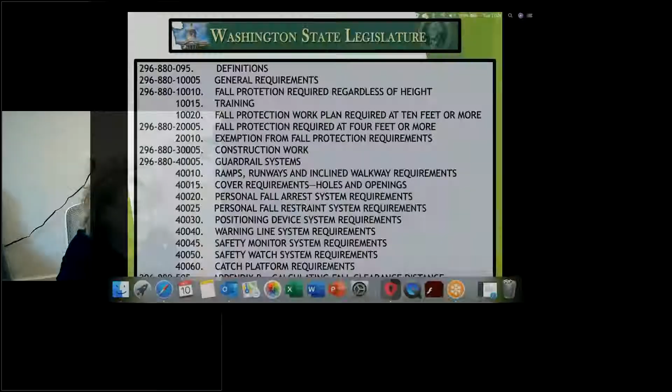Excellent, good, perfect. All right, welcome everybody, two weeks later, I hope everybody's been doing well. Tracy and I were just talking about the crazy weather going on around here, and I hope we're all ready for the winter months. I couldn't imagine being roofers out there in the wet and the snow and the winter months, so good on all you guys. Hopefully you didn't have any questions that came up over the last two weeks about what we covered in the first session. If you do, please feel free at the end of all of this, ask your questions and I'll try to answer them as best as I can.

You have handouts from the first session and handouts from what we're going to cover here today, so I just wanted to refresh your memories. It's been two weeks. These are the new WAC codes, the Washington Administrative Codes. It's now 296-880, and we covered 095. We covered the definitions, we covered the 100s, which were the general requirements, fall protection regardless of height, your training requirements, having that fall protection plan. We covered the 200s, which was fall protection required at 4 feet, because now in the Unified Fall Protection Code, we really only have two trigger heights: at 0, regardless of height, and then at 4 feet.

Then you get into the 300s, so we're going to cover 300-05, which only pertains to construction. There's 310, 315, 320, so on and so forth, but guys, I really didn't think any of us cared about those. That's for ski lifts and for ports and different industries out there that are not actually construction. So in the 300s, this is now what's required above 4 feet for the different industries you belong to: fixed industry, construction, the ski lift area, all of that kind of good stuff. For the 305s, we'll talk about construction — it's really just the 10-foot rule.

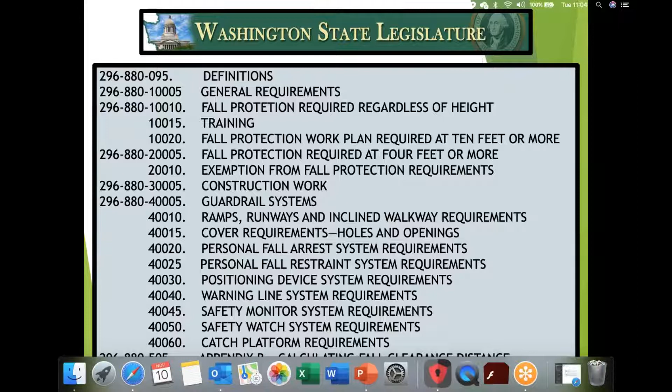So let's jump into the 300s. Construction work, and what do we have to do for construction work? 300.05: this scope only applies to work activities under 296-155, which is construction based, unless it was specifically addressed in the 200 section, which was the 4-foot rule. So employers need to ensure that some kind of fall arrest system, restraint, or positioning device is provided. Make sure we're installing it per the manufacturer's requirements, that we implement it in accordance with this chapter, anytime we have workers exposed to hazards that are 10 feet or more above the next level. So you could be 10 feet off the ground, or 10 feet above another level. This does include, if you guys were to ever work from a scissor lift, 10 feet, fall protection; boom lifts, fall protection 100% of the time. You need a fall protection plan as well. If you're working off of scaffolds, that falls into the 10-foot rule as well — with most scaffolds, it's a 10-foot rule. So when do we have to provide protection? At 10 feet or more. Look at you guys, you lead the way.

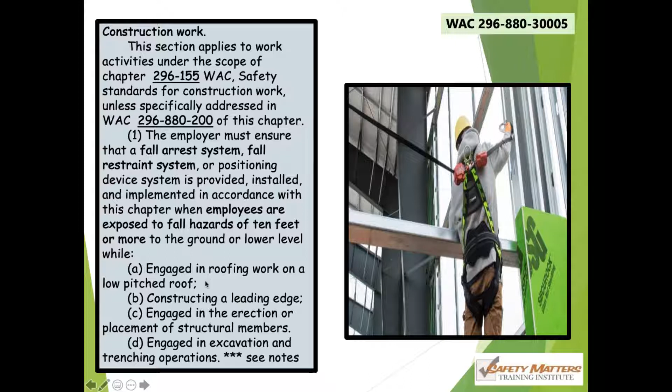Engaged in roofing work, only on a low pitch slope though, only on anything that's less than 4 and 12. If you're constructing a leading edge, remember what a leading edge was, that was an activity, it's a verb. You have to be actively laying down some kind of form work, some kind of roofing.

You need to be laying down form work, constructing a leading edge, or engaged in the erection or placement of structural members. What were structural members? That was a girder, a beam, a joist. If we stand the walls and we're walking on that 2x4, that 3.5-inch top plate, that's now considered a structural member. So we have a 10-foot exemption for these guys.

At 4 feet, low pitched, you guys don't need any fall protection per se. But once you get to 10 feet, then you're going to have to protect. And the bottom one, D, does not apply to you guys. I highly doubt you're trenching or excavating on a rooftop. So this is for the ground workers, the dirt workers.

There's always been a 10-foot rule. You don't have to be in fall protection if you're actively involved in an excavation or trenching operation, actively involved. If I'm just wandering around that trench or excavation and not engaged in the work taking place, then if it's deeper than 10 feet, we're going to have some protection for me. There's going to be exemptions.

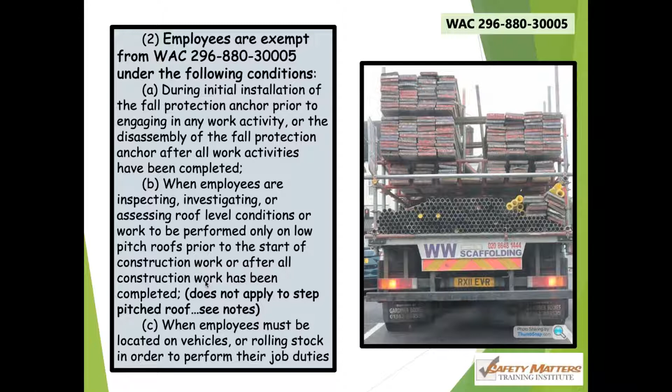So the 305 guys, it's really short. This is it: 305 at 10 feet. Who gets to, or when do you have to provide protection? 10 feet, roofing, leading edge, standing up structural members. There's exemptions to the 10-foot rule. These are basically the exact same exemptions that went into the 200 4-foot rule.

So who is exempt? First man up, last man down. You're going up onto the rooftop to set your anchors, you're exempt. You've finished all of your work, you're the last guy coming down, disassembling your anchor point, your fall protection system, you're exempt.

Inspecting, investigating, assessing the roof level conditions, again, only low sloped, less than 4 and 12. Anything over 4-12 is a steep pitch, and you are not exempt. So what was inspecting? You're going up on the rooftop to inspect to see how much materials you need to do your job. You're investigating. What was investigating? We're going up on the rooftop to look for damage, to assess if there's anything that needs to be repaired.

And then assessing the roof level conditions. Anytime we're going up on the rooftop to try and figure out what type of fall protection we're going to be providing to our workers, we have an exemption as well. Low sloped only, this does not apply to steep pitched roofs.

You probably don't remember this, but back in the 200 code, it stated that a working walking surface was anything that we worked from, stood on, passed along, gained access to, and it included flatbed trucks. So at 4 feet, if I was working on a flatbed truck, potentially my employer would have to provide fall protection for me if it was feasible, if it made sense, if it was not going to create a greater hazard.

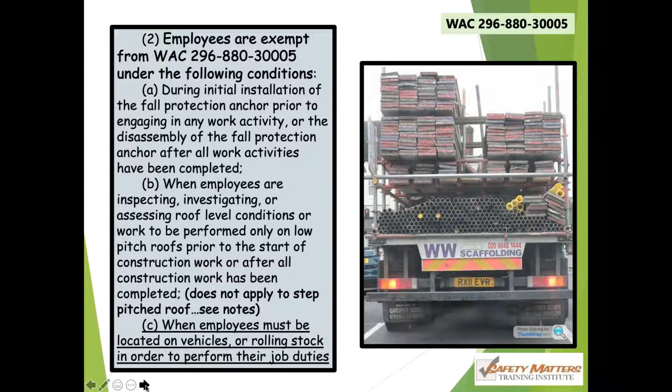So that's really all we need to talk about when it comes to the construction portion of this. Again, 10 feet when we're roofing, less than 4 and 12 when we're performing leading edge, laying down the formwork or the roof work, laying down those plywood sheets, or if we're standing structural members or engaged in trenching.

So how do you protect people? Guardrails. Guardrails are always the preferred method. Why? Because guardrails prevent the fall - they restrain you. And restraint, prevention of the fall, is always going to be your preferred method. So we'll talk about guardrails.

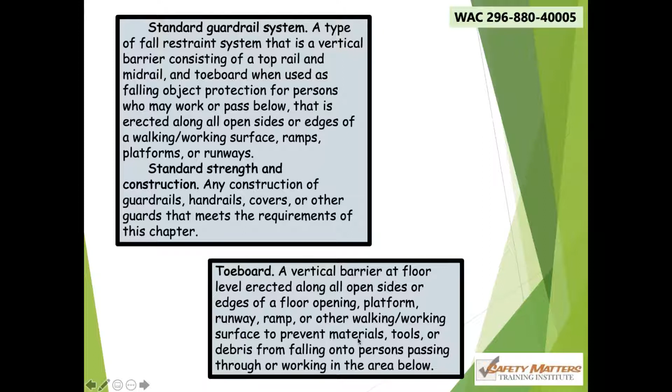Any open sides above 4 feet has to be protected. If there's people working below you, toe boards need to be put into place so we're not kicking stuff down on top of them. All of your walking and working surfaces - open sides, ramps, platforms, runways - above 4 feet need to have protection made out of standard strength construction. Toe boards act as an overhead restraint for kicking off tools or materials, saving materials, tools, and debris from falling onto persons passing through or working in the area below.

So guardrails, you guys should all be pretty familiar with this. Nothing really changed in the new unified code when it comes to guardrails. Your top rail, we like to see it at 42 inches, but you have a plus or minus of 3 - you can raise it up to 45 or drop it down to 39. This is always from the work surface up. It still has to be able to withstand 200 pounds of bursting strength.

This is if I'm basically pushing down at it from a downward angle onto the top bar, or from a sideways, lateral angle onto that top rail. It has to be able to withstand 200 pounds minimum - we can always beef these things up and make them stronger. Mid rail goes in at mid height, whatever you chose for the top rail. Mid rail has to withstand 150 pounds.

Toe boards - there was a change to toe boards. Previous to this WAC code change for the unification of fall protection, toe boards in Washington State were technically required to be 4 inches in vertical height, not more than a quarter inch off the ground. Nobody had 4-inch toe boards. The common practice is a 2x4 flipped up on its edge, but 2x4s are not actually 4 inches. OSHA says it's a 3.5 inch requirement, so we changed our standard here to just meet OSHA - it's now 3.5 inches vertical height. Best practice, of course, is always going to be your 2x4 on its edge.

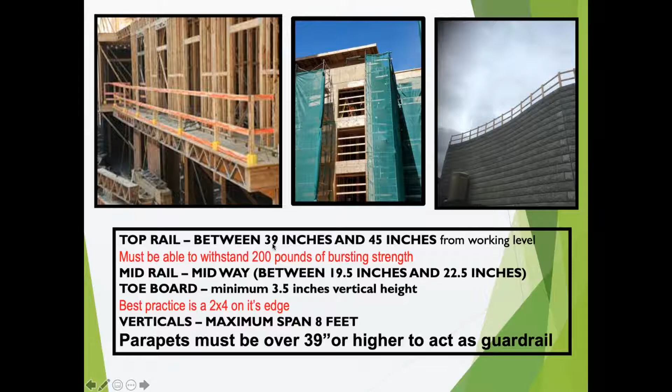Your vertical members of your guardrails, not to exceed 8 feet. When you guys are up there on the rooftop, if that parapet on the roof is less than 39 inches, it cannot be part of your fall protection. It can be the mid rail, but it cannot be your top rail. So the parapet wall, if it's less than 39 inches, you might have to bring in some other means and methods to protect your worker. It's got to meet that lowest minimum requirement of the top rail to then be considered fall protection.

Okay, so guardrails, where do we use them?

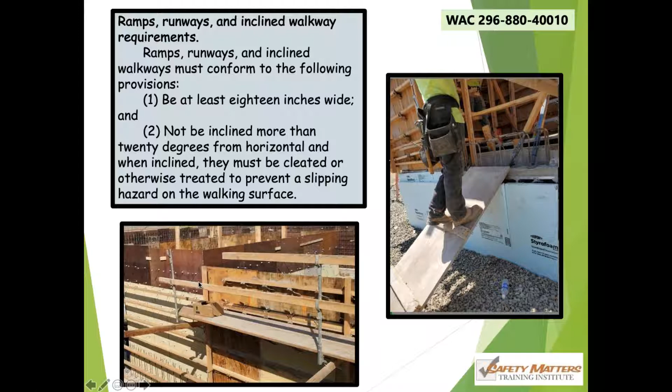Here you've got guardrails that don't extend all the way out along the open sides and don't close off that end there, so this is where they would need protection. Up there on the rooftops, if we have any holes on the ground, we're going to have to protect them.

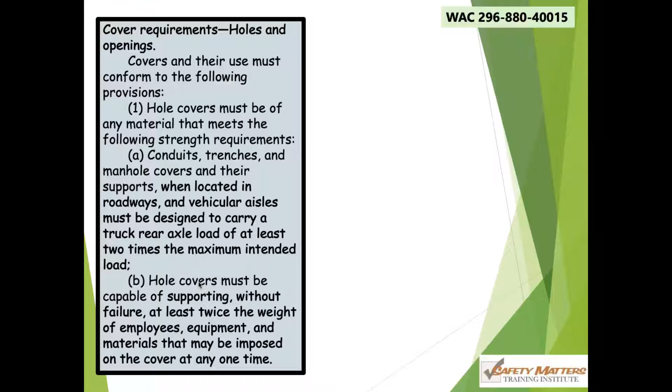What was a hole? If you go back to what we talked about 2 weeks ago, a hole was anything, a void that was greater than 2 inches in its least dimension. It was in the floor, in a roof, or in any other surface, so that can mean it's in the ground as well.

Hole covers need to be made of material that meets the following strength requirements. If you have holes located in roadways and vehicular aisles, they must be designed to carry a truck rear axle load of at least 2 times the maximum intended load. How much does that truck weigh? What's the load in that truck driving over that steel plate? Can that steel plate withstand 2 times the rear axle load of what's being intended on it? What's being imposed on it?

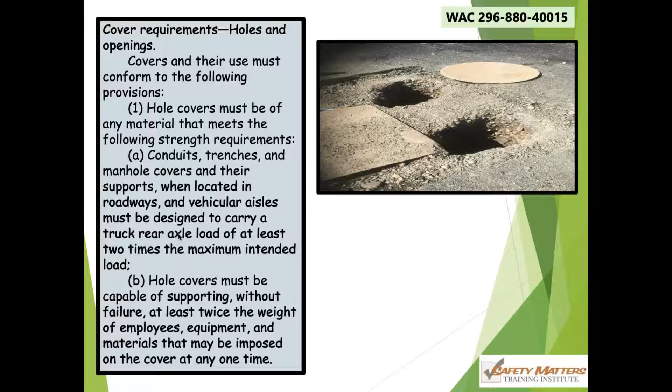Covers need to be able to support. This is new, a new strength requirement for hole covers. They must be capable of supporting without failure at least twice the weight of the employees, twice the weight of the equipment, twice the weight of the materials that may be imposed on that cover at any one time.

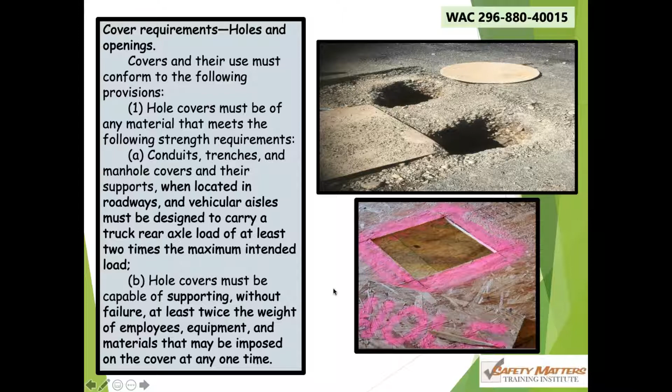So here's a hole that's been opened up. They've written hole on their cover, but they've left it unattended. That's one thing you cannot do. If you're going to remove a cover and you have a hazard, you cannot leave it unattended. You've got to post somebody there to warn everybody that there is a hazard.

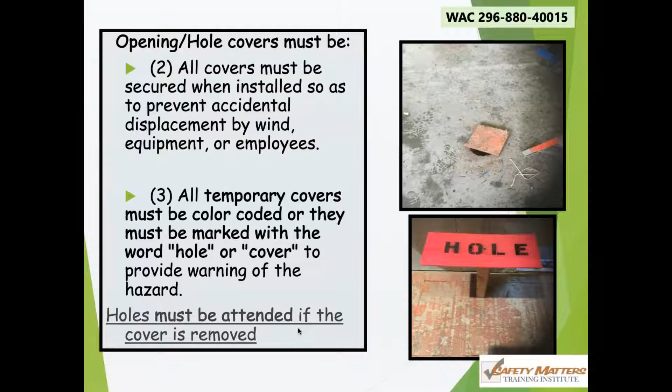A hole is a void 2 inches or larger through which an employee could step into, trip into, or step through. Anything larger than 2 inches needs to be protected. So you can cover things, or you can ask your workers to wear a PFAS, a personal fall arrest system.

There are some requirements that come into wearing personal fall arrest systems. Obviously, we need to wear only an ANSI approved class 3 full body harness. ANSI, American National Standards Institute. Fall arrest, fall protection gear is a Z359 series, so it has to meet the Z359 series, full class 3 body harness.

Anything that's been subject to impact loading, if a worker has fallen in it, it's removed immediately from service. It's not to be used again until it's been inspected by that competent person. A competent person simply has skills, knowledge, ability to recognize hazards, ability to predict hazards. They have some safety training, experience, and stop work authority. So it's usually the competent person who's inspecting the equipment.

Anything found damaged is removed from service. It is not reused. Some components, like your cable SRLs, you can send those back to the manufacturer and have them recertify it for you and send it back to you.

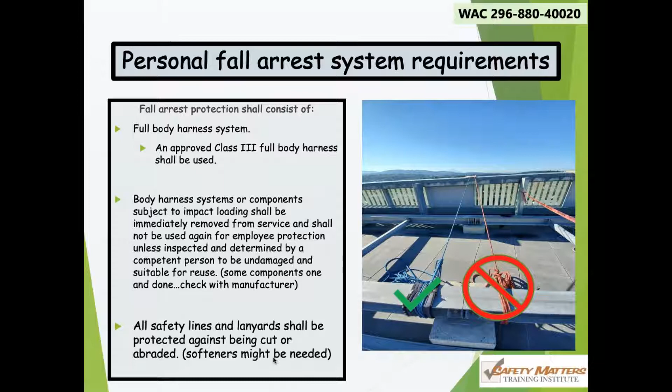So the red one, big no-no. Left one is okay with the softeners. What's not okay is just tying that rope around, wrapping it a couple of times and tying it back on itself as your anchor system.

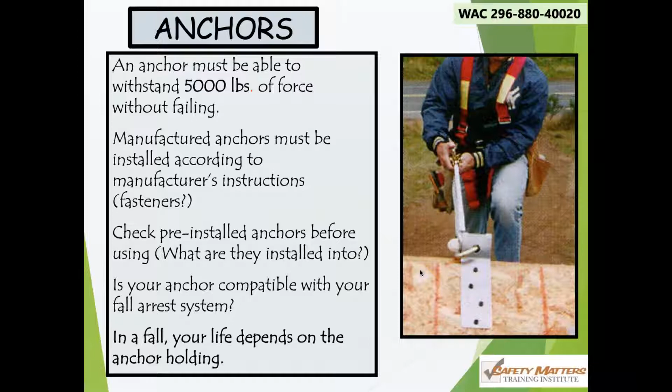Anchor systems up there on the rooftop, guys. Sometimes you have permanent anchors, sometimes you might be working with temporary anchors. It's just the same, anchors, nothing has changed here. They need to withstand 5,000 pounds of force, and they need to be installed per the manufacturer's requirements.

I love horizontal lifelines. I think any chance you get an opportunity to put your crew in a horizontal lifeline, do it. It minimizes your swing fall factor. It keeps an anchor point pretty much always in line with your worker.

But the problem about horizontal lifelines is, of course, you're anchoring low. With most of them, they're anchored to the rooftop, which means that if you were not using a lanyard, like a 6-foot-long lanyard, if you were allowed to get up to the edge, you would need to make sure you were in a leading edge yo-yo.

But there are temporary anchor systems that you can anchor up high. There are some that come with cross straps, so you can wrap a cement column and string it up between 2 vertical members that can support 5,000 pounds as part of your anchoring system.

Horizontal lifelines, great little device out there. I really encourage people, when you have the opportunity, get your workers out of lifelines where all the slack is out. There's only like two anchor points on a rooftop, and they've walked 30 feet away from their anchor line. Get them into a horizontal lifeline if you can. Figure out some system to keep that anchor point always right there with your worker.

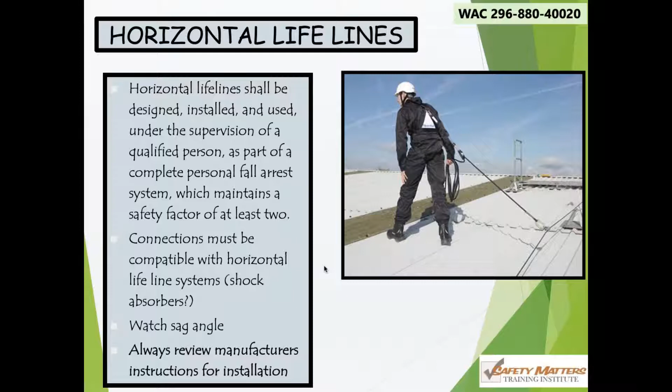Horizontal lifelines, another way you can protect. Here's an example of a horizontal lifeline. I did a competency fall protection training on a Microsoft rooftop because they had brought in this really cool horizontal lifeline system with a new toggle that actually ran over the anchor point. So we did a fall protection training on that horizontal lifeline. It was a slick system, you guys. I tell you what, that was a really neat system.

But again, Microsoft, there's probably a little bit of extra cash going into these projects than on some of your residential construction work. One thing they brought into how do you protect people - if you go to 40035, you get into self-rescue devices. With self-rescue devices, you have a couple of means.

Trauma straps, I highly encourage that you spend - they're a $30 accessory, you guys. Spend the extra $30, get your workers into trauma straps. They're universal, they attach to any harness out there. There's different makes, different models - DBI Sala, Guardian, FallTech - all of these guys have trauma straps out there.

It's just a way for your worker, once they've fallen and they're waiting for you to figure out how to get them safely down to the ground, they can deploy their own trauma straps. They can put their legs into them. They can get circulation back into their legs. Blood likes to pool in our lower extremities when we're hanging from a harness. So this way we can get circulation.

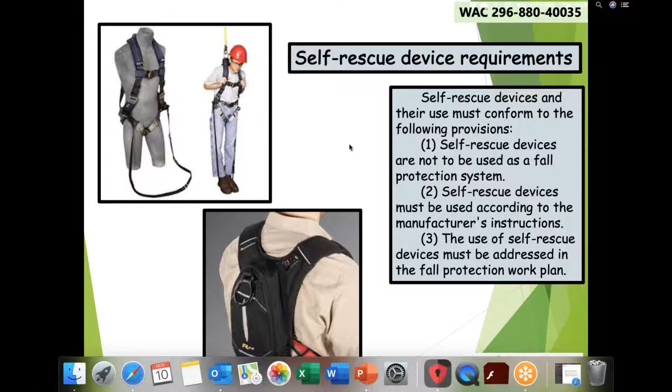If you're going to bring a self-rescue device into your fall arrest, it must be addressed in your fall protection plan. Don't forget to put that in your plan, and then ensure that all of your workers have actually been trained in how to deploy these systems.

So the warning line, this is a really good method of protection that you as roofers can engage in. A warning line system, low sloped pitch only, cannot be steep pitched. Warning line, anybody can use this. It's not just for roofers and leading edge. So sparkies can use it, your plumbers can use it, your HVAC guys can use it.

Anytime we're less than 4 and 12, even leading edge work on low pitched open surfaces, for activities other than roofing work or leading edge work, okay? So if I'm not a roofer, if I'm not doing leading edge, the warning line has to be 15 feet back, around all unprotected open areas of that work area. If I'm roofing and I'm doing leading edge work, we can potentially push that warning line out to 6 feet from that edge.

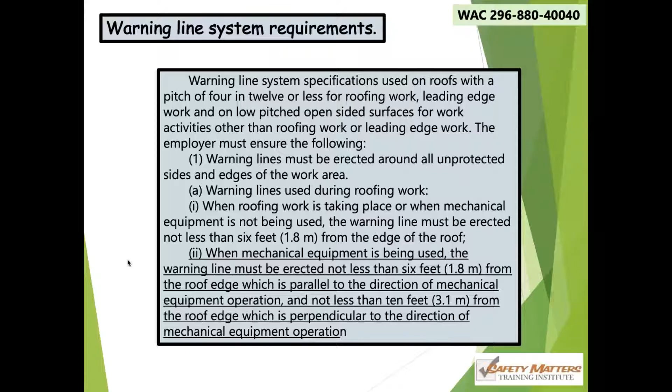If we have mechanical equipment up there on the rooftop, it can't be less than 6 feet, all right? And depending on the direction in which we're working with that equipment, it's either going to be 6 feet or 10 feet. So if we're working parallel to that roof edge with mobile equipment, it can be 6 feet. But if we're working perpendicular to that warning line, it has to be 10 feet.

There really should be no equipment stored beyond that 6-foot mark. If you're storing equipment out here beyond the 6-foot mark, anybody going underneath that warning line system to get that equipment, those materials, they would need to be protected. So they would need to be anchored off to duck underneath that 6-foot warning line, okay?

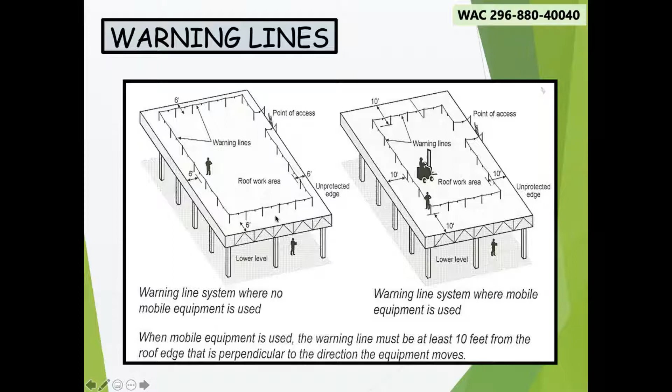So warning lines, no more than 4 and 12. You can use a rope, you can use a wire, you can use a wire cable, you can use a chain. Heck, you can even now use danger tape or caution tape.

So there was a change to our warning line. In the new Unified Fall Protection Code, there was a change to the strength requirements of our warning line. L&I, prior to the changes, just said that your warning line had to be able to withstand 200 pounds of tensile strength.

Tensile is pulling apart strength, right? If I pull on it and you pull on it like a tug of war, it shall not break with less than 200 pounds of tensile strength. Well, OSHA was always very curious about this because OSHA says a warning line has to be able to withstand 500 pounds of tensile strength. So they're like, Washington, we need you to clean this up. And so Washington did. Your warning line now has to be able to withstand 500 pounds of tensile strength.

If you use danger tape or caution tape, it has to be at minimum 3.5 inches wide, and it has to be able to withstand 500 pounds of tensile strength. And there is extra strong strength warning line and caution tape, danger tape, that can actually withstand that tensile strength.

No adverse weather conditions, guys, that's up to you and your competent person. They do not define what adverse conditions are. It could be too rainy, too snowy, too sleety, too icy, too foggy, too smoky, too windy. Adverse, that's up to you to determine. Usually it's the competent person determining adverse conditions.

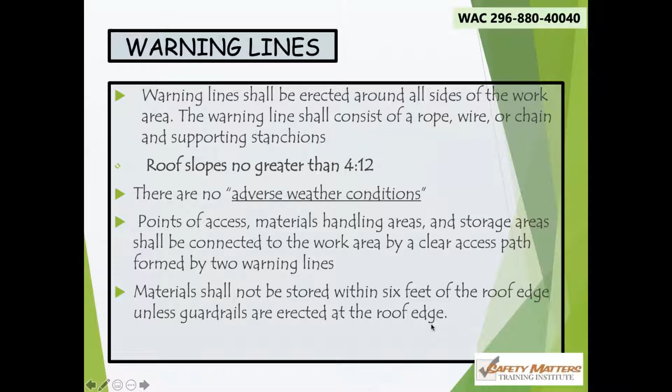Points of access, materials, storage, connected to the work area by clear access forming 2 warning lines. I need to know exactly where I can walk on this rooftop. Materials not stored within 6 feet of the roof edge unless guardrails are erected. If you're not erecting guardrails, you're going to have to put a worker into a harness and fall restraint or fall arrest if I'm allowed to go under or closer than that 6-foot mark.

Warning line, you guys can use it. You can push it out to 6 feet when you're actively roofing. But that means if you're going to be up there on the rooftop and you're going to erect your warning line system, if there's sparkies and plumbers and they're wandering around the rooftop with you, your warning line's been pushed out to 6 feet. Those sparkies and plumbers, they're not allowed to use that 6-foot warning line. They need to maintain a 15-foot clearance from all open edges. So be very cautious and careful about allowing other trades to use your warning line if you've pushed it out to that 6-foot mark.

So roofers and leading edge workers can use the warning line system. Roofers and leading edge workers can also use the warning line system with the safety monitor, okay? If the roof is less than 50 feet in width, you can use the safety monitor without the warning line system. But if it's wider than 50 feet, you have to bring in both safety monitor with the warning line. Nobody but roofers and leading edge workers can use a safety monitor. It's just the 2 of you as a trade who can actually use your safety monitor.

If you guys do engage in the safety monitor, I really want to impress upon the fact that this is the biggest adult game of Simon Says that you're ever going to play, and it is literally for your life, because nobody has to potentially be in fall protection. You are solely relying on that safety monitor to ensure that nobody falls off the rooftop today. So it's a big game of Simon Says. That safety monitor needs to be competent. When he says stop, just like Simon Says, when Simon says stop, everybody better stop. Safety monitor absolutely not allowed to engage in any other duties while he's acting as the safety monitor.

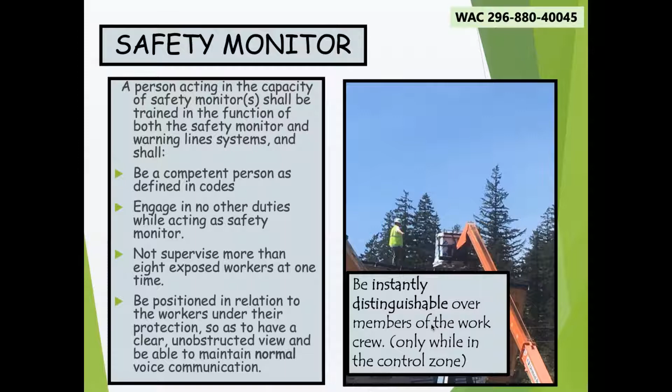So I'm in pink, Tracy and her crew are wearing our typical high-vis yellow. If there's any other workers up on the rooftop not exposed, they need to be in a different color as well, so we can quickly identify, okay, there's the 8 workers that Erin in her separate color is actually monitoring. All the rest of those guys in lime green are not supposed to be in the affected area. So potentially if you had a bunch of people up there, you might need 3 different colors of high-vis so we can instantly distinguish all of these members.

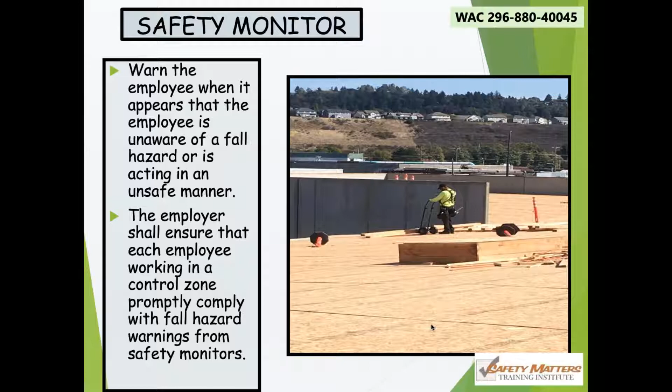My job, safety monitor, is to simply warn you if it looks like you're going to be doing something hazardous, if it looks like you're going to be getting yourself into trouble, not paying attention, looking down at your phone. Here's a guy with no warning line, the warning line has fallen over. He's standing fairly close, about 3 feet away from that edge. He's not in any kind of fall protection. He's waiting to receive materials and he's looking down at his phone. So every employee working in the control zone must promptly comply with the fall hazard warnings.

You could use a safety watch system. A safety watch is a 1-to-1: one person performing the repair work or doing the actual work, one person monitoring that person, not to get within 6 feet of the edge of the rooftop, where exposure to falls is infrequent.

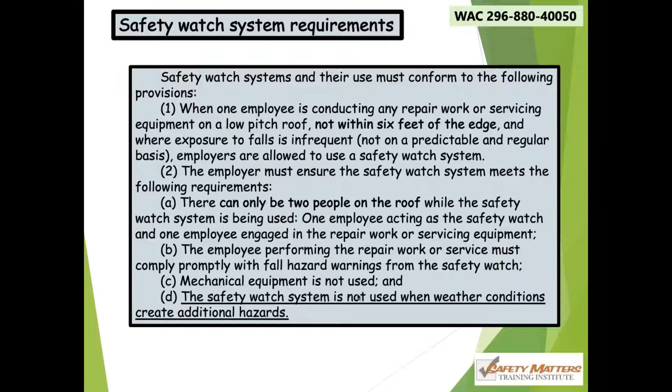So this is when we can use it. The employer must ensure the safety watch system meets these requirements. There can only be 2 people up there on the rooftop when it's being used. One person is acting as the safety watch while the other employee is engaged in the repair work or servicing of the equipment. You cannot have mechanical equipment in use, no mechanical equipment. And you cannot use this when weather conditions create additional hazards - too windy, too rainy, sleeting, snowing, and so on.

Catch platforms - a lot of times I hear from roofers, there's a scaffold right below you, can we use the scaffold as part of our fall protection? This was an area where L&I and OSHA differed significantly. L&I has always said that a catch platform, prior to this new unification, had to meet the working-walking surface definition, which used to be 45 inches by 45.

Now a working-walking surface is just anything that we can stand on regardless of its width, okay? So L&I said it had to be 45 by 45, had to have guardrails around all open sides, had to be erected no further than 14 inches away from the side of the building, no more than 4 feet from the actual roofing area, had to have toe kicks - pretty much right there for us. But it didn't have a strength requirement. No strength requirement for L&I, and OSHA found that quite odd.

OSHA actually says that you could use a scaffold system as your catch platform because scaffolds have a strength requirement - they must be able to withstand 4 times the intended load. But L&I was like, oh heck no, you can't use a scaffold, no way. So they fought back and forth a little bit, and what was finally agreed upon is that we're still going to say you cannot use a scaffold, but we're going to give a strength requirement to our catch platform. So catch platforms must meet the strength and stability requirements of supported scaffolds, which is 4 times the intended load. You still cannot use a scaffold in Washington State, but we placated OSHA and gave it a strength requirement.

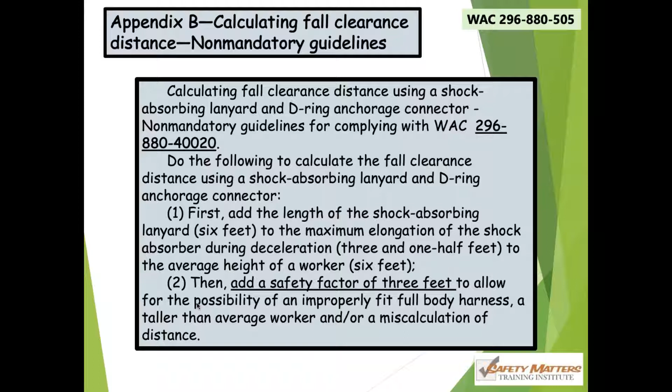All right, guys, that basically wraps it up. That's the protections for the 300 code, your 10-foot rule. Who's got a 10-foot exemption, basically? Or when does fall protection start? For roofers, low sloped, it starts at 10 feet. At 4 feet, you don't have to provide any protection. At 4 feet low sloped roofing, you don't have to have fall protection for your workers. At 10 feet, you do.

You're exempt, first man up, last man down. You're exempt when you're inspecting, trying to figure out how much materials you need to do your job. If you're looking for damage, you have to do some repair and you're assessing the damage. If you're assessing the work area to try and figure out what type of fall protection you're actually going to use for your employers or employees, you have that exemption, okay?

Only low sloped pitched roofs. You protect by using guardrails. You protect by covering your holes. Holes have a strength requirement of 2 times the weight of the worker, the materials, the load that's going to be imposed upon them. That's always minimum.

Guardrails go in at 42. Mid-rail goes in at mid-height. Toe boards are now 3.5 inches tall.

We have new strength requirements for the warning line system: 500 pounds tensile. If you're using rope or cable for a warning line system, you must high-vis it out, put a high-vis flag every 6 feet. But that's not new, that's always been a requirement - warning lines high-vised out every 6 feet. So the new requirement is 500 pounds of tensile strength.

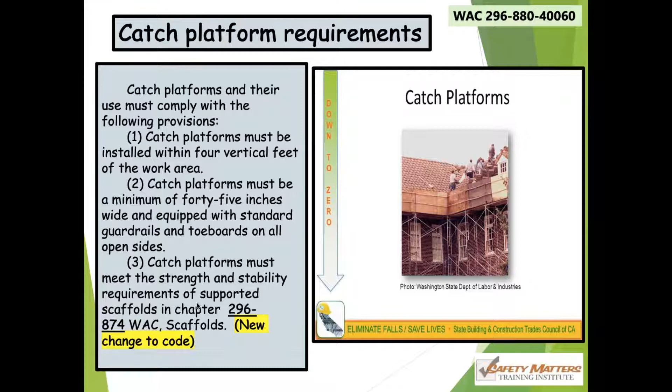The first question is, does your company have any competent person training? Absolutely, yes, thank you for asking that question. We train all kinds of things. We can do a quick 2.5, 3-hour awareness class. We can do a 4-hour competency, 6-hour competency. Like I said, I ended up doing a 16-hour competency class for the roofers out there on the Microsoft campuses. So we can tailor it to your needs for sure.

Awareness classes, right now we've been doing awareness classes including fall protection with ladders, and it's a 4-hour class. But we could do just fall protection for you, and that would drop it down to like a 2.5, 3-hour class. Competency really should be no less than 4 hours, preferably 4.5, 5 to 6 hours for the length of a competency class. We go into a lot more details, a lot more inspecting of equipment, ensuring they understand swing fall hazards, the clearance factors needed for effective fall protection.

So we go into a lot more detail for our competency classes. But just remember, sending them to one of our classes does not make them competent. You as employers determine who's competent, and you send them to one of our classes, and we provide the safety training. So somebody's competent because they have some knowledge, some skills already shown in fall protection. They have the ability to identify and predict hazards for fall protection working on rooftops. They have some knowledge, some experience - we cannot give them experience, right? And then you give them the stop work authority. They don't have to be leads, supervisors, or foremen, it can be anybody in the crew who just has those attributes. So absolutely, if you would love more learning, more classes, we would love to train.